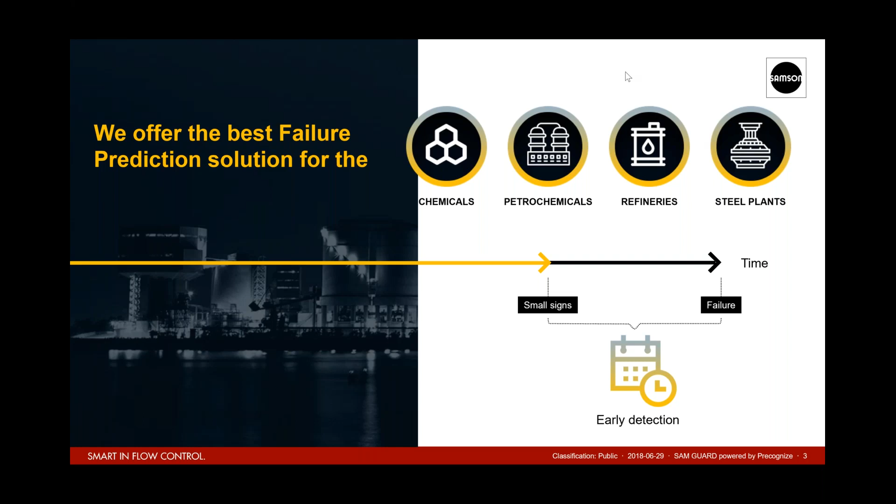Now, in this presentation, I will not try to convince you to license Precognize. What I would like to try to convince you is what's the right strategy when you're talking about predictive analytics, predictive maintenance, predictive monitoring. Now, I'm sure many of you have done some activities in terms of trying to predict failure of equipment. And many of those companies are looking to predict the most expensive equipment, or the equipment that doesn't have redundancy. So the most expensive compressor, which doesn't have redundancy, and if it fails, the plant is down for 30 days. So all companies are going and trying to predict

this aspect. Some of them are adding to that what we call condition-based monitoring, which means that for some equipment, we will try to, from time to time, check the equipment. If we don't see cracks, if we don't see anything that will trigger an alert, then we continue and use them until we see those things. Now, condition-based monitoring is something which can work for some of the elements, some valves out there, maybe some pumps, but it's not across the organization. It's here and there within your plant, things that you can absorb if they would fail.

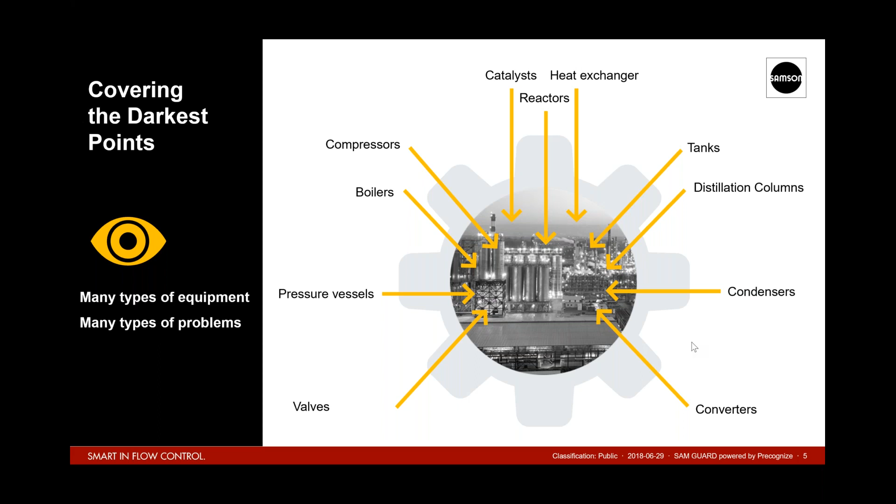We see a reason to focus on everything because everything can cause you a failure. And just to give you an example from one of our customers, this customer is based next to a city, and they had a flare event. Now, a flare event is, of course, in the news, it's bad PR, it's material going to the air without any reason. We all agree that a flare event is not something that you want to experience.

This flare event was caused by a very simple element, a valve, and actually a mechanical valve that was installed there and was sticky for a while. And because of that, the system stopped and had to release the pressure, and this pressure went to the air, and then bad publication and so on. Now, this event happened on the 1st of September. We demonstrated that this event could have been seen 3 weeks before.

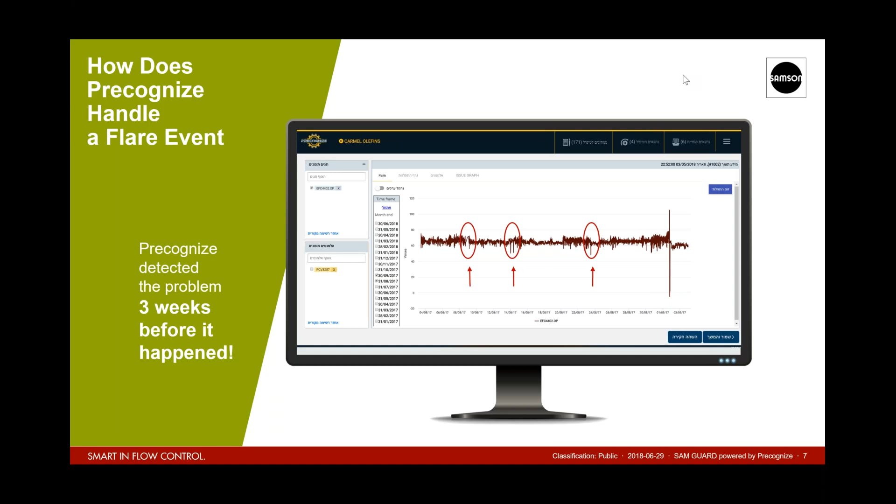So 3 weeks in advance, we could tell the operating team in this plant, listen, you have a problem with this valve. And this is exactly what we're doing there today. We're covering hundreds of valves, hundreds of pumps, towers, whatever, and we're pinpointing for them every day where their next problem is going to be before it actually causes this flare event. So there is a problem here of failures. There is a potential of saving, and the other nice thing about it is that you already have the data.

Because all we do is analyze data, and most plants in the process industry, from sophisticated chemical and petrochemical to other less sophisticated plants, all have thousands of sensors going to the DCS, and for most plants from the DCS to the historian, where the history of this data is stored. So we have the process data: temperature, level, flow, pressure, and so on. And in some cases, less frequently, we also have equipment data such as current, vibration, bearing temperature, and so on. So there is a mountain of data being collected in those plants.

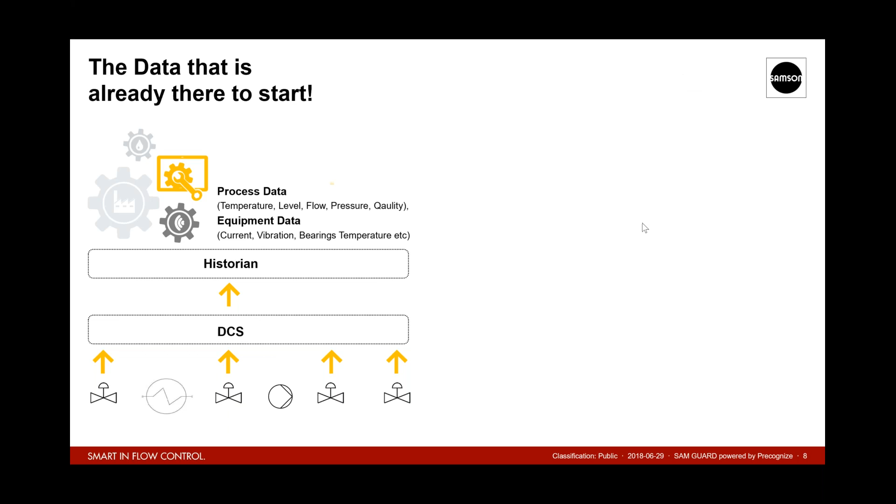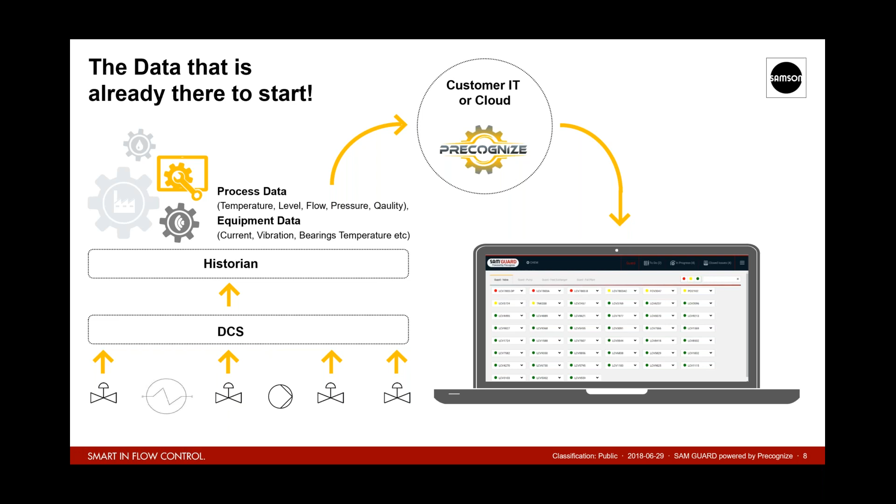And by the way, from what we are seeing today, this mountain of data is actually not very heavily utilized. The process engineer would look at 20, 30, 40 tags a day, but nobody can look at thousands of sensors every minute and try to identify where there is a problem. And that's exactly what we're doing. We're taking the data you're already collecting from the sensors you already have, and we analyze it in a smarter way to eventually tell you, listen, check this valve, check this pump, check this leakage in the heat exchanger, because that's your next problem. This is what we're trying to do, an early detection.

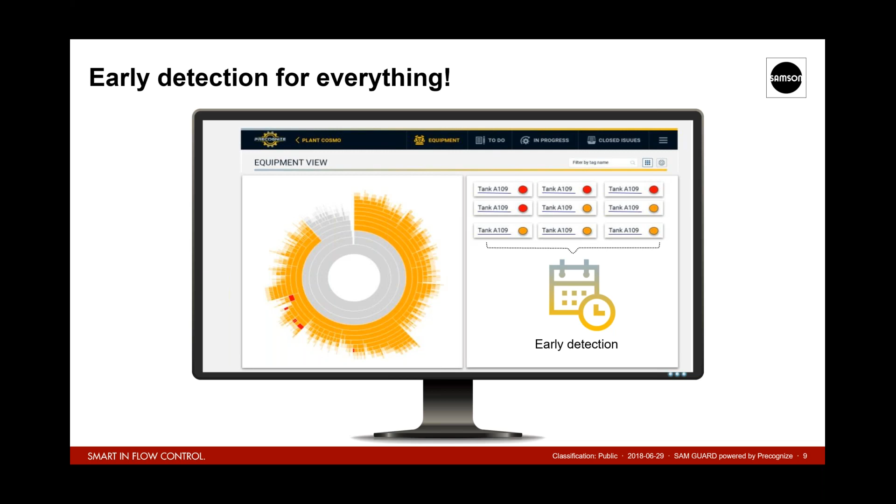Now, just keep in mind that when we're telling you, listen, you have a problem, it's probably 3 weeks in advance. It's going to be there. Check it now or experience a failure in the future. Now, the benefits are pretty clear. Dark corners are always dangerous and scary, and the first thing that comes to mind is the direct cost of failure. If you have an hour or a day of shutdown, you can calculate better than I can how much money it costs you.

And when I'm talking to customers, some of them say, yeah, but we are already monitoring the compressor, we already have some kind of analytics, we have some trends in our historian that we're looking at. I have a very simple question here. Do you still experience failures, or do you have no unplanned failures in your plant? If the answer is everything is smooth, no failures, you can listen to the rest of the presentation, but I don't think you'll gain any value. But I almost haven't seen a plant that doesn't have unexpected failures. And if you're still experiencing unexpected failures and you have the data there, I just don't see a reason not to try to prevent it.

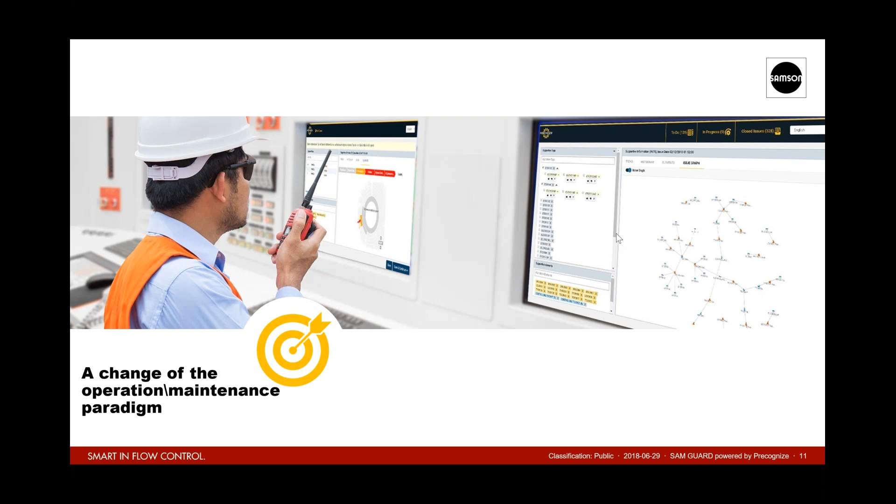But you have to keep in mind that this is a change in paradigm. It's a change from what you're doing today, which is mostly reacting to what is happening, to an approach which is predictive, which is what's going to happen. How are we going to deal with this situation, which is going to hit us in the future? And now we have many alternatives. It's a completely different ballgame.

From reacting to something which has probably one solution, let's replace it, now you have many options. Maybe I should go to the redundant system. Maybe I should reduce the flow on that pump or valve, and from there reduce the probability of failure and keep it until the next maintenance, and so on and so forth.

And this is influencing the people and the process and the equipment that you may need, because it may be that your people there are really data savvy and they think about the different alternatives, but you may have people who are used to the way they did things for 20, 30 years. So you have to think about this as a change in paradigm.

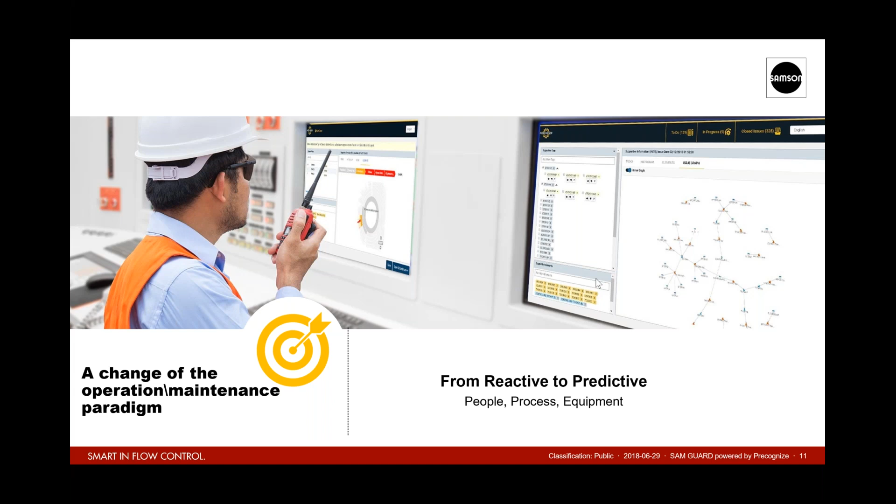So the one thing that we're bringing when we're talking about predictive monitoring is that we're actually changing the way you operate your plant. And this is something that has a lot of potential, but it requires a change. Now, I will not go deep into technology and how we do things, but just to give you a feeling about when we're talking predictive maintenance, predictive monitoring, what do we talk about?

Now, when we started, there were a few requirements. The first requirement that people told us is, listen, we have a control system. We have hundreds of alerts in the control system. We don't need another system that will trigger hundreds of alerts. Even if these alerts are predictive and even if these alerts are great, we just don't have the capacity. It doesn't matter.

So what we're limiting ourselves to, and this is, I think, one of the biggest advantages of the way we work, is up to 5 alerts a day. And think about your plant. Probably you don't have more than 5 failures a day. So this number should be completely sufficient. Up to 5 alerts a day.

Now, to tell you, listen, you have a problem, I don't know exactly where, go figure, again, it's not a solution. So the other requirement was, please be clear and pinpoint the problems. Tell us that it's a problem with this valve. Tell us it's a problem with this pump. Tell us it's a problem with this heat exchanger. Don't tell us there is a problem somewhere in this section, or there are anomalies in the plant which we don't really know what they are. So pinpointing specific processes or specific parts was part of the requirement.

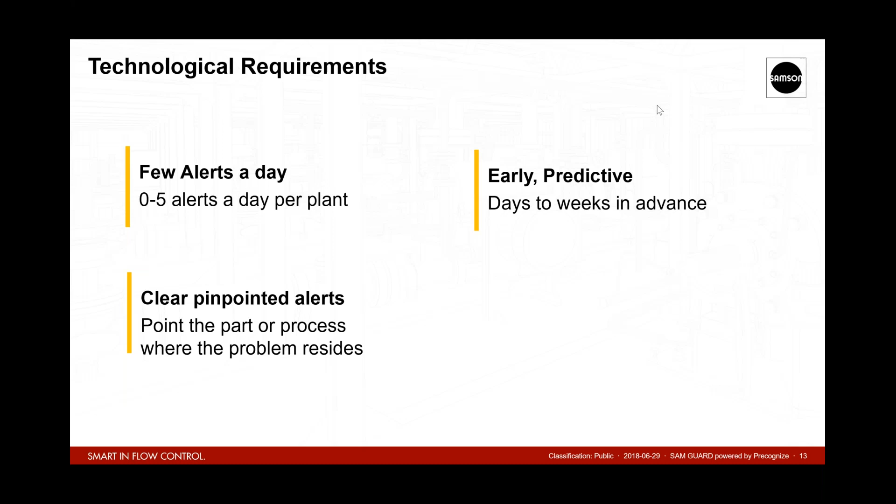Now, in terms of technology, there are various technologies out there. Okay, and all plants that I know of have a control room and have a control system, and many alerts there, and this is nothing about predictive. Okay, this is the traditional monitoring. It's nothing about predictive monitoring. It's just the same traditional thing. If something is there, it's already too late.

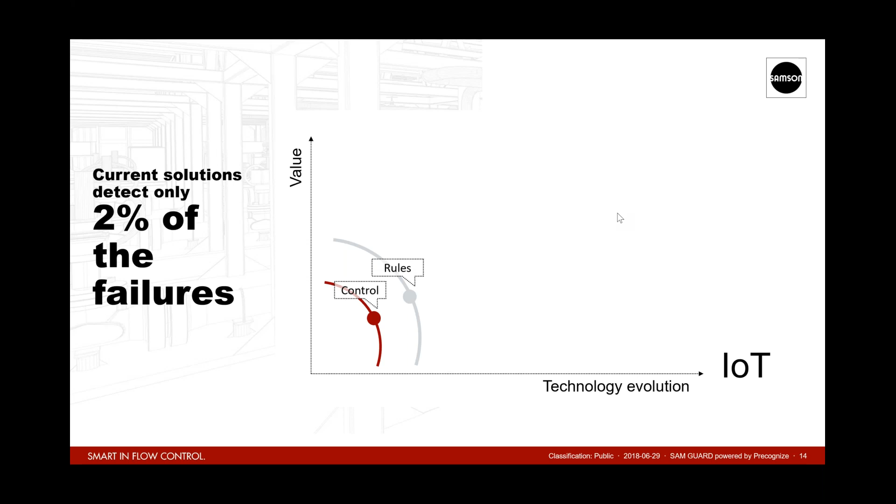It already happened. And to that, you can add some rules that people are implementing, saying, okay, if I have pressure difference beyond something, I want to trigger an alert. But again, it's not very predictive, and it's very, very simple.

Now, I talked before about the option to predict things that already happened in the past, what we call specific prediction. And this is a valid approach, but it's a valid approach only if you have many historical cases. Okay, because in order to predict something that happened in the past, you need to have many cases of this thing. And if you don't have many historical cases, then your prediction will probably be poor or even unavailable.

So if you have a plant which every pump failed 100 times and every valve failed 100 times and so on and so forth, then you can maybe cover the entire plant by doing a specific prediction. In reality, this is not the situation. A pump failed once, twice, one time it was in summer, one time it was in winter. The conditions are completely different. So actually, specific prediction is good only in the rare cases and not in the general case of monitoring everything that can happen, let alone the fact that things that happened in the past will not necessarily happen in the future.

So in terms of technology, when we're talking about predictive maintenance, predictive monitoring, we're talking about things that are coming from machine learning and are around finding when the plant, the system, the equipment is starting to deviate from its normal behavior. Okay, we're not trying to predict something that already happened. We're trying to see very, very early that something is starting to go wrong. And if something is starting to go wrong, it will probably give you those days to weeks in advance until you will really be affected by it. And this allows us to look at those thousands of sensors and try to identify when something is starting to go wrong within those thousands of data points.

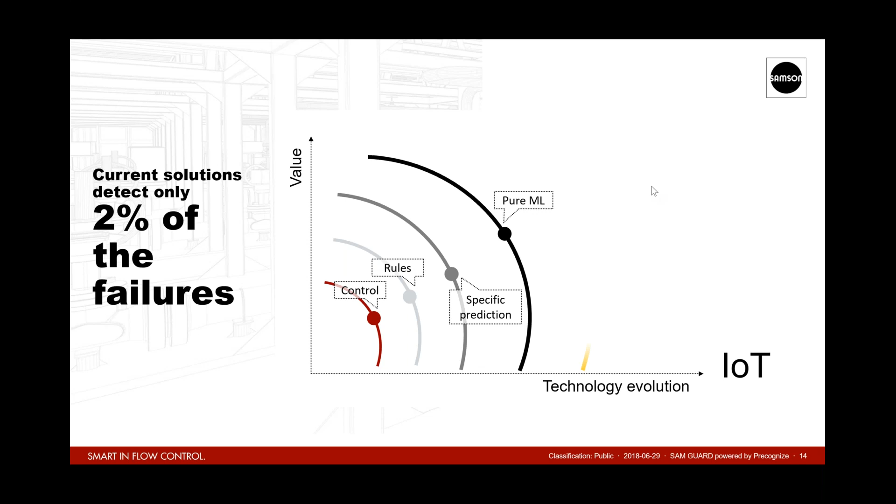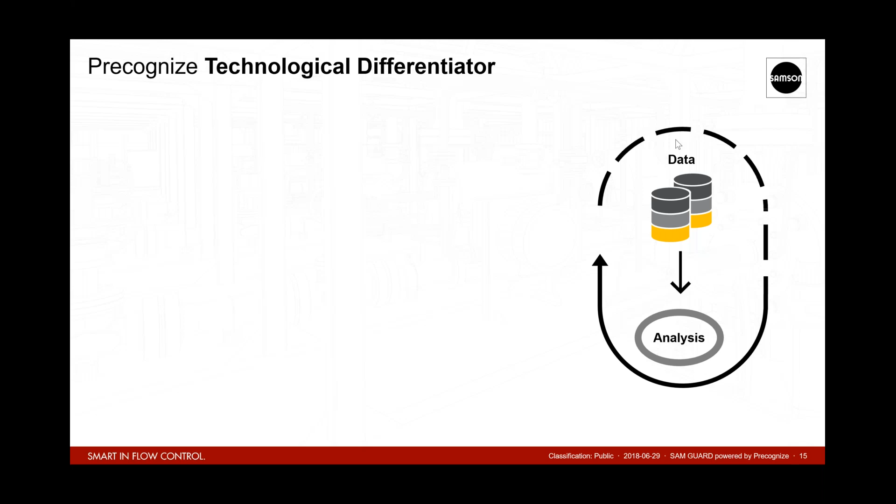Okay. Now, the problem with identifying anomalies is that actually there are many of them, especially in the process plant. Okay, because a process plant, and you know your plants very well, a process plant is never stable. Things are moving, the ambient temperature is moving, production is changing, everything is changing. And there is so much data. So actually at the end of the day, when you're running a machine learning engine, what you're getting are anomalies in the data. And those anomalies in the data are very, very different from problems in your plant.

And if you're going to show those anomalies to the process engineer or show them in the control room, you're going to get hundreds of anomalies. It will be just as bad, or even worse than the regular control system. Okay, because machine learning is very, very sensitive, especially when you have so many sensors in a plant which is completely not stable.

So what we understood, and again, I'm not going to go into the details about the Precognize technology, but what we understood is that in the process industry, you have to build a layer on top of the machine learning. And this layer is actually the way the plant is built and the main processes in the plant and how they are all connected to each other. And most of this is coming from the knowledge of the process engineer, of the people in the plant. And this allows us actually to be completely industry agnostic. I don't care if I'm running in the cement plant or I'm running in the chemical plant.

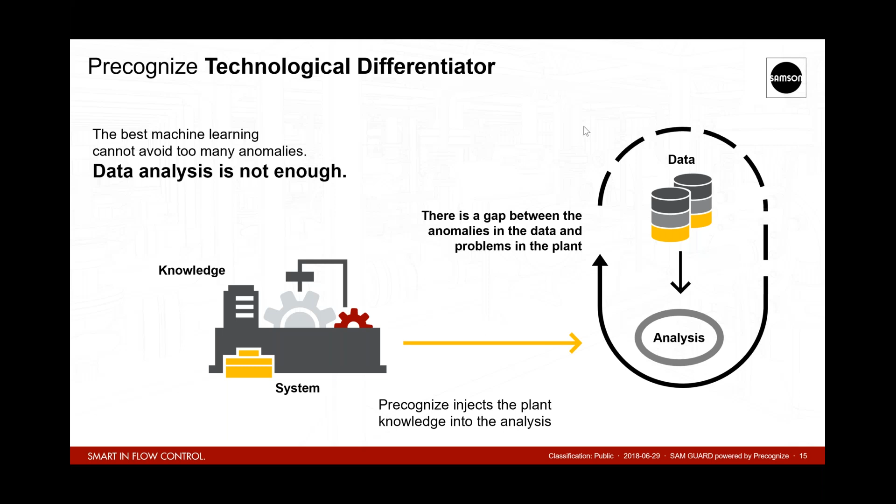What I do care is that there will be a person in the cement plant that knows his plant, and the same for the chemical plant. So what we have done is that we created a very simple user interface that allows the process engineer or maintenance engineer or other people who know their plant to basically configure the structure, behavior, and the data connection of their plant. And this configuration, usually for a chemical plant, will take about 2 weeks of work.

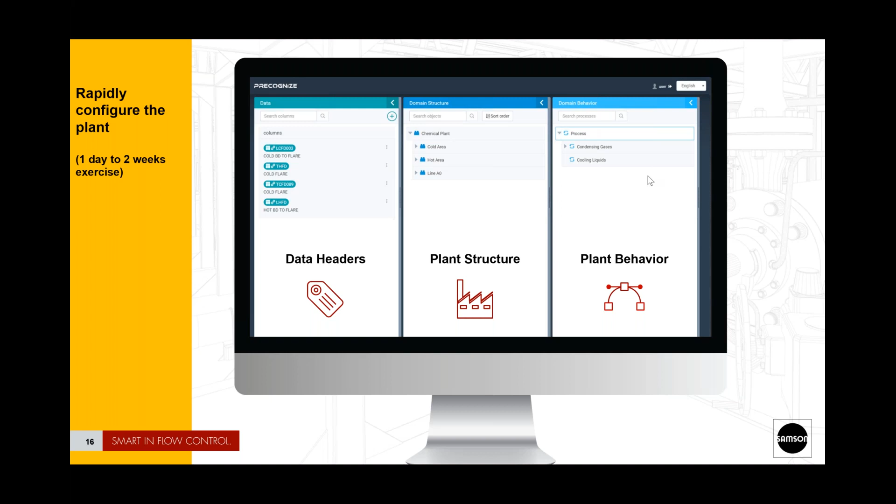And this configuration allows us to create another layer on top of the data. And this layer, which is internally actually represented as a graph, allows us to know how everything is affecting everything. And what is happening if you're opening the switch here or opening the valve here, what will happen to the temperature, to the pressure, what will happen next down the road.

So we can actually go through the path of the causes within your plant in order to take those many anomalies that are triggered by the machine learning and pinpoint those 0 to 5 alerts a day, which tell you, listen, you have a problem with this pump or you have a problem with this valve. And again, I'm not going to go into details here about exactly how it is done. And if you're interested, you're more than welcome to contact us and to have a specific demo about the technology.

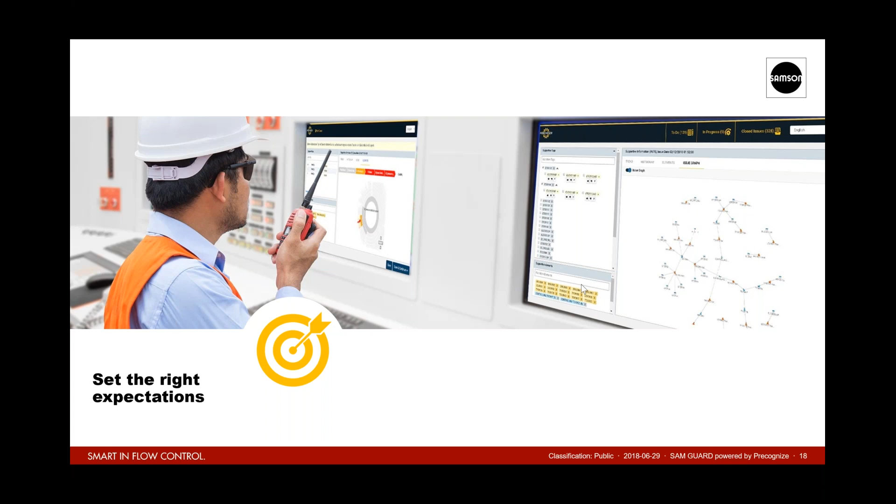But the bottom line is that we're taking those thousands of sensors, we're doing those 2 weeks exercise, and at the end of the day, people are getting 0 to 5 alerts covering their entire plant. Okay. Now, on the other hand, to set the expectations right, because, you know, we are all analyzing data and we're all very proud of that.

Remember that at the end of the day, it's not replacing the human thinking. It does not replace the professional people that are sitting there in the control room or the process engineer who eventually need to make a decision, what to do, how to act, choose from the alternatives. Speak to me in 10 years from now, maybe, or 15 years from now, maybe it will all be automatic. And maybe it can be automatic for very specific cases.

But the general rule is that we can take all these thousands of sensors, we can analyze them, we can show you the things that are going to happen. You will need to make your decision what to do about it. And this is one of the major challenges that our customers are facing once you start using this predictive monitoring, once you start using the data, once you're doing this digital transformation.

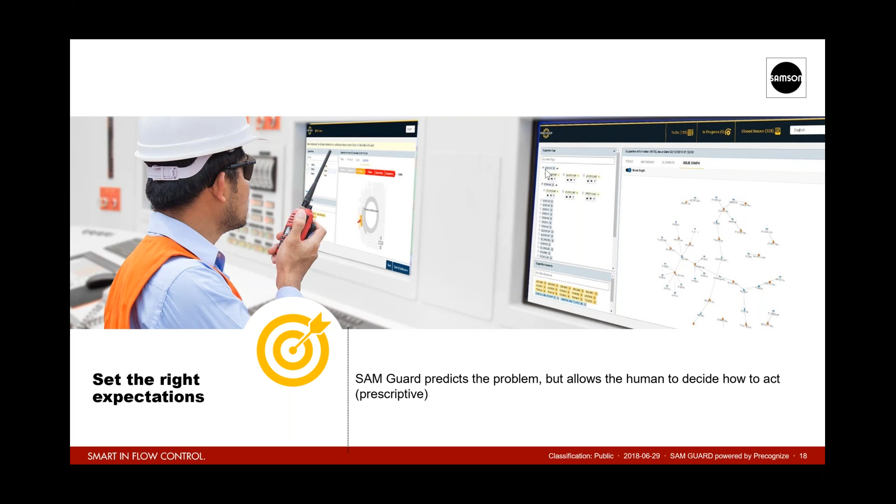So to go back to the benefits and now to how do we measure. When you're applying this kind of solution, you actually want to be able to measure how well you've been doing. And there are actually three parameters that we'll look at. Two of them are really measurable. The third one is, again, we're back to gut feel. But if we manage to reduce the direct cost of failures, this is really money in the bank. I mean, this is more production that you can generate.

If we reduce the number of maintenance emergency cases, where you had to expedite parts or pay more for the vendor to get things, or pay people overtime in order to solve it immediately, again, this is actual saving. And finally, the third parameter, which is hard to measure, but it's very, very important for the people who actually operate the plant, is that you'll get smoother operation. Because if you know about things in advance, you can get prepared. And when you can get prepared, it's a completely different way of operating the plant.